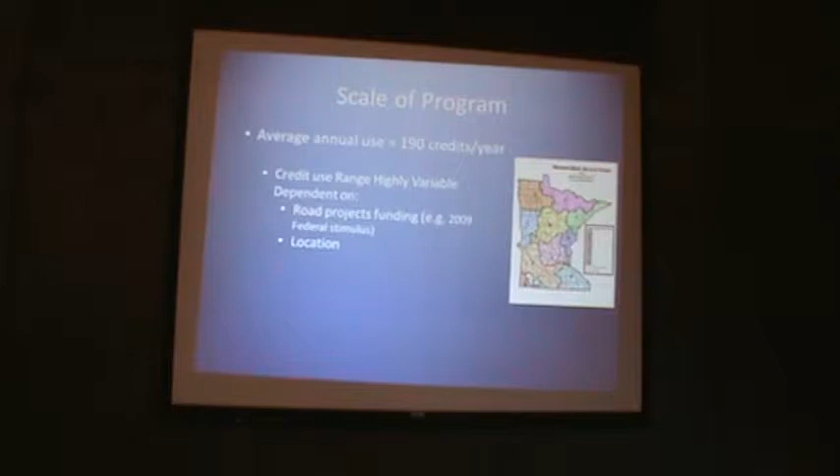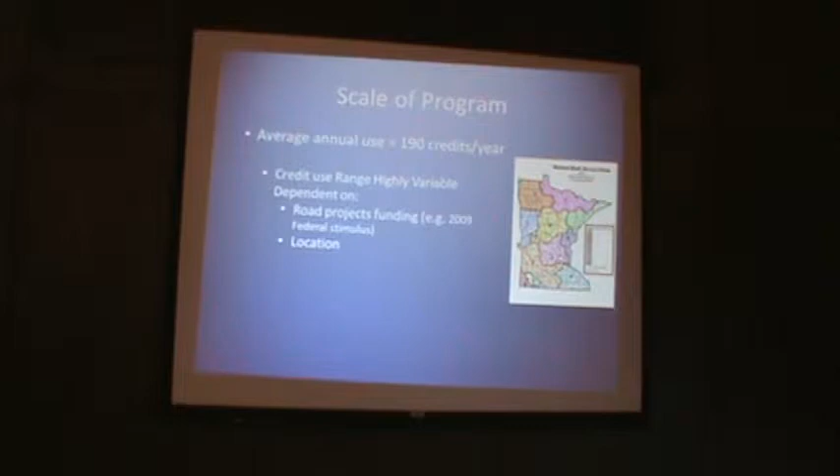It's also dependent on road funding. Remember back in 2008, 2009, the stimulus packages? Road projects were the number one game in town. So it's highly variable how we use these, and we have to go to the legislature and say, for this next biennium, we need $10 million. They say, why do you need that much? Well, here's our basic use. So it's hard for us to give the legislators a hard number, but those are some of the things we have to play with in order to receive the funding.

So who can use it? Local road authorities—these are cities, counties, townships. And that's about it.

People that can't use it are airport commissions—it's not a road, right? Train authorities, again, it's not a road. State agencies, in particular, in most cases we're talking about the DOT here. They have their own replacement program, they have their own wetland banks, and that's kind of how we got started. The DOT was a partner with us.

Developers can't use it. Now, some people argue, hey Dennis, these developers are creating new roads, okay? New roads, it's not eligible. But what if they're doing a development and the city says I need a turn lane here now because you're doing this? Well, that turn lane is caused by the development, and that's why it's not eligible.

Federal agencies, U.S. Fish and Wildlife, Forest Service, and tribal governments. Now, the caveat with these two is they're big landowners in the state of Minnesota, and what goes through these? County highways, right? A county highway has a right-of-way through that. So if a county road is going through Forest Service land, that's still eligible for use in the program because it's in that right-of-way. And the applicant is going to be a local authority.

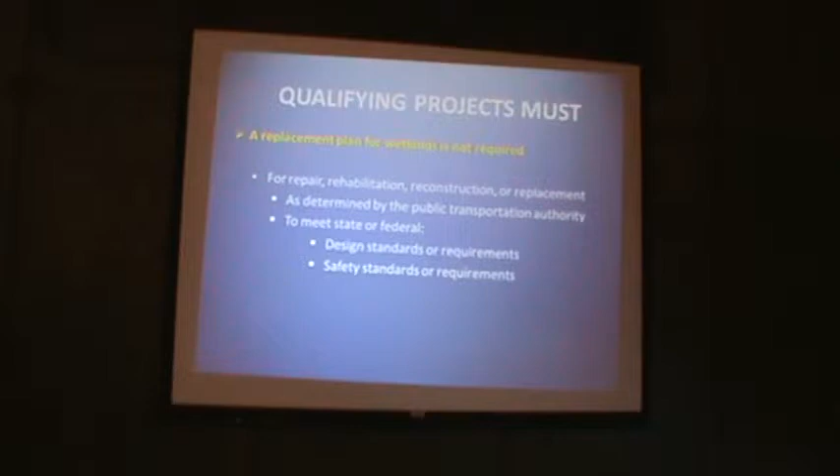A replacement plan for wetland is not required. The legislature said local road authorities, you don't need a replacement plan, because we are the replacement plan—we are the credit generator. So if there's no replacement plan, there's no LGU decision either.

We'll get into that. This is for repair, rehabilitation, reconstruction, or replacement as determined by the public transportation authority. Now that's a lot of authority right there—a lot of power that the local road authority has, because they are the ones that determine the project need. And it's to meet state or federal design standards or requirements, or safety standards and requirements.

And this is where the TEP comes in. We don't evaluate the standards—we're not traffic engineers or safety engineers. We just make sure it's in the application.

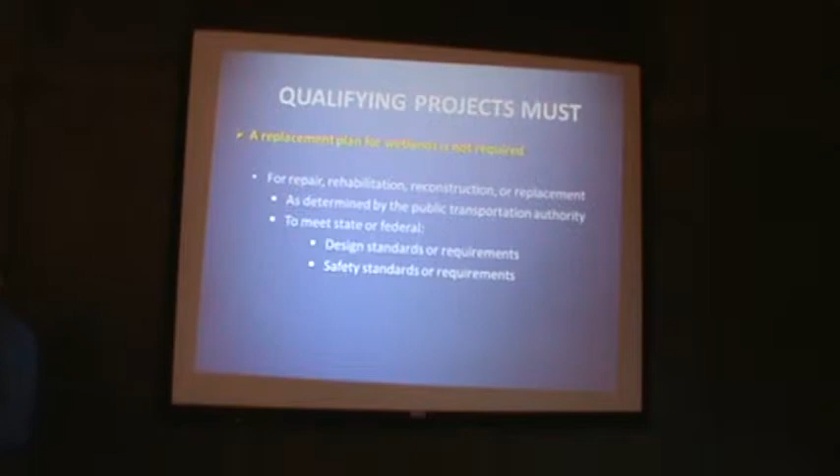Okay, a project must minimize wetland impacts. Now, how is the TEP supposed to look at a project and say you're minimizing these impacts, if we don't know what the standards you have to meet are, right?

A project must also consider replacing important wetland functions on site. Now, I've been doing road projects for over 10 years, and I really haven't had a situation where we've had on-site mitigation that was unique—think of a wetland adjacent to a trout stream, something like that, or maybe something with T&E species in it. It's got to be pretty special, because on-site replacement, a lot next to a road, not all great.

Project applicant must provide plans to the bank administrator—that'll be at the tail end. And the TEP members is where you really need to focus your efforts, because they're going to be the qualifying governing body there. And then any public requesting a copy—we don't get that too often.

So these plans have to come in prior to construction at least 30 days. Now that's high risk, okay? So what happens if you say, you know what, here you go, Dennis, 30 days, I'm gonna start my project. Then, sorry, Allison, guess what, you're not eligible. What did you just do to your client? You really put them in a bind. So maybe this rule or statute says 30 days, but don't do it. Get yourself way ahead of the curve.

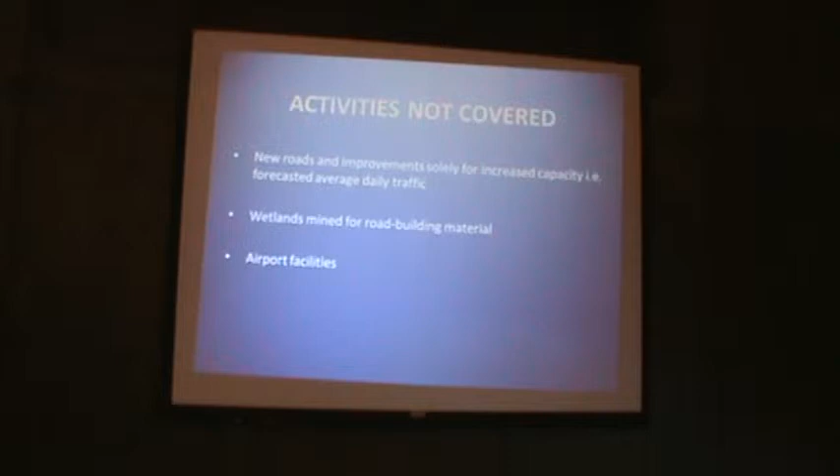Non-transportation facilities, county highway, local road authority, I need a salt shed. All right, hey, City of Columbus says, you know what, Dennis? We're gonna put a parking lot here, this is a ride and share, this is gonna take vehicles off the roads, make the road safer, blah blah blah. Sorry, can't do it, no parking lots.

This one comes into the metro quite a bit. We got to increase the drainage. This got developed over here, this got developed, and this got developed, and all of a sudden I got all this water. Well, unless that water is a threat to the structural integrity of that road... Remember, the drier the core of a road is, the safer it is. And who goes, if you're driving down in northern Minnesota and you know this road is through a wetland and you start seeing this action, right? We've all driven on those kinds. That's because the core of the road is saturated. So only if it's threatening the structural integrity will we cover it.

Roads through tribal or U.S. Fish and Wildlife ownership and control, okay. This is a forest road, this is some small two-track or paved road in the reservation that does not have a right-of-way.

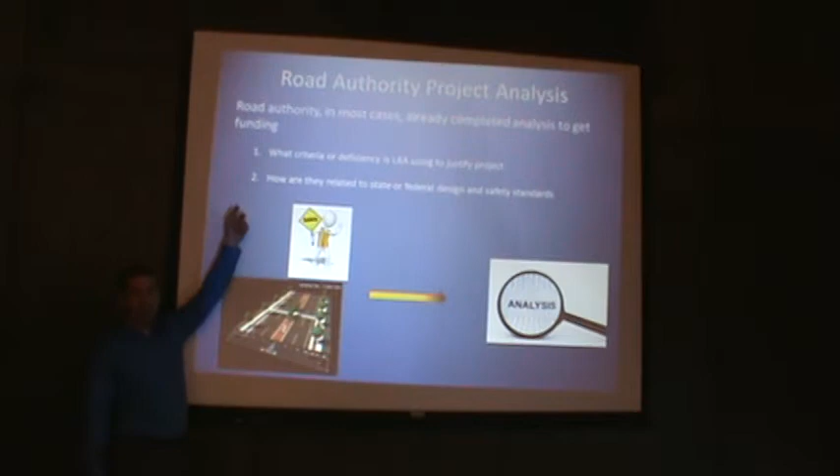Generally, in order for a local road authority to get funding from federal highways or DOT, they had to do some type of analysis to get the funding. So, the two things, and these are the two things I want you guys to think about every time you write an application.

If there's two things you take away from today, it's these right here. What criteria or deficiency is the local road authority using to justify the project? What is it? What's going on? Is it a design issue? Is it a safety issue? Is it some other requirement? And then, how are they related to the state or federal safety standards that are out there?

What I've learned through going through these applications is there's so many things to look at. There are MnDOT state standards. There are. But that doesn't cover all the situations. There's what's called the Highway Capacity Manual. It's kind of like a user's guide on how things go. So these are the kind of things we'll be looking at.

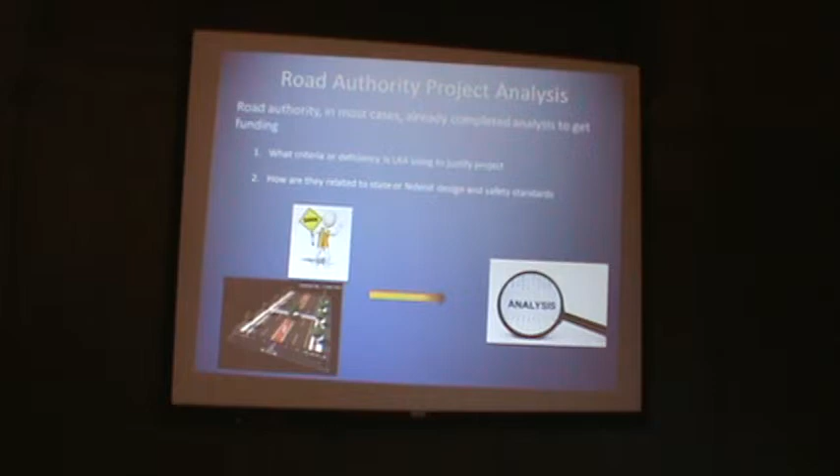And remember, as a TEP, we're not judging or evaluating these standards and practices. We just put it in the application. You say, Dennis, I gotta have this because this state standard says I gotta do this. Okay, it's in the application. Good.

All right, so some common data, ADTs, and I realize that not every local road authority is going to have the level of data that we go through here. Sometimes they don't have any, if they're doing it on their own, which is a tougher argument for you as a consultant, but it doesn't necessarily kill the project or kill the use of the program.

So here's some common ones. ADTs, again, show the deficiency in the current conditions. Why? Like ADT is way too high for this type of road. This is a 2-lane rural undivided. My ADTs are 15,000 and it's rated for 10,000.

I'm not going to pretend to understand what 15,000 cars a day looks like. What I'm going to do is make sure it's in the application, and then put it into context: how that project meets the standards.

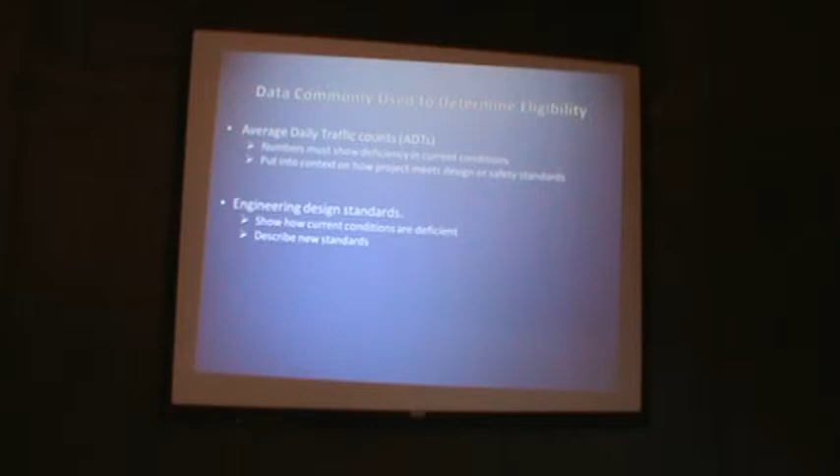Engineering design standards - there's a lot of professional judgment when it comes to these engineers. It's fine, they're an engineer, this is their job. But they need to be able to communicate what these standards are and the justification for those standards. Sometimes there's new standards that come in. Bridges and culverts - all of a sudden, hey, I got to do something. Well, now there's a new water quality standard. What is it?

And they said, well, here's a table, and this is for a bike trail, or for the road that's going to be also used to facilitate bike travel. They say my lane width has to be 12. Currently my lane width is 11 feet. My shoulder width has to be 6 feet. Right now it's 3. Okay, you're in.

Data commonly used to determine eligibility - this I just recently got from an engineer at SEH, and I really appreciate that.

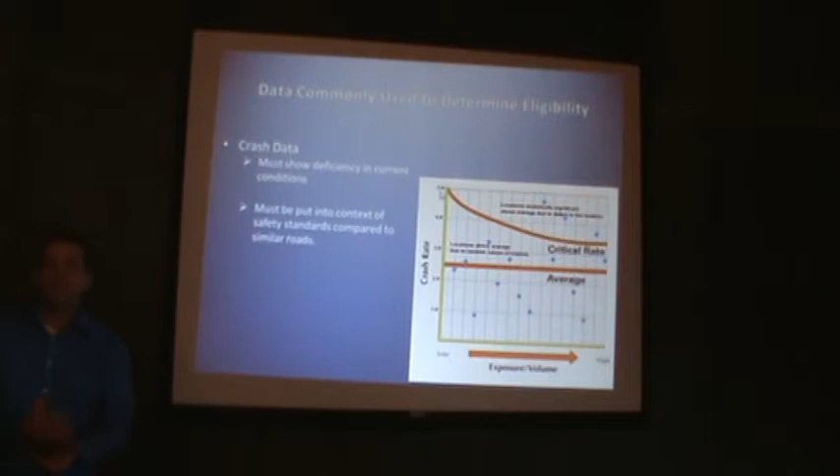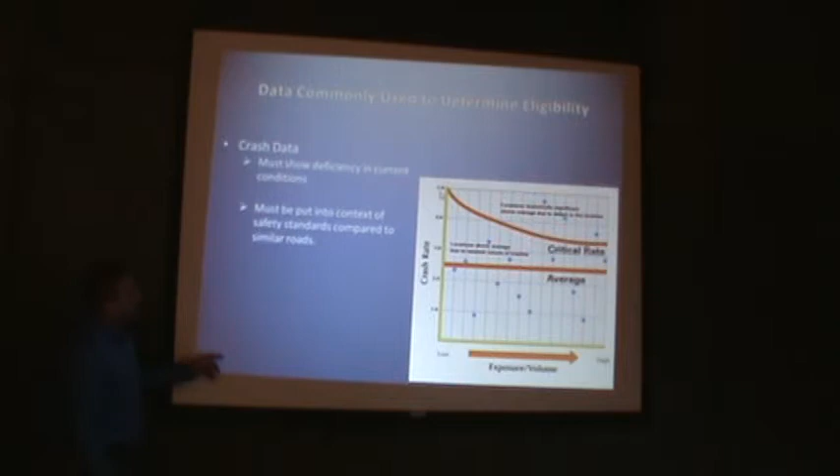So, an intersection, they'll measure the crash data. There's several ways they'll measure it. They could do it in per million vehicle miles, which I have no idea what that means, but there's different ways to evaluate it. One way is they look at these roads. So here's your crash rate here, here's the average - that's safe, we're good to go. Here's like, there's just a random nature to crashes, and you're still fairly safe.

And here's this critical rate - hey, this thing is bad, we're going to change things. So in that crash data, show the deficiency, and then put it into context for me. We're going to go through some specific examples of applications that have come in that I've reviewed. All right, so that's what we'll do here. Questions so far? Quiet group, it makes me nervous.

Okay, so turn lanes - maybe you look at the ADTs, maybe you look at crash data. Are they higher than the state or federal standards? So you think of a turn lane, what else are you going to measure?

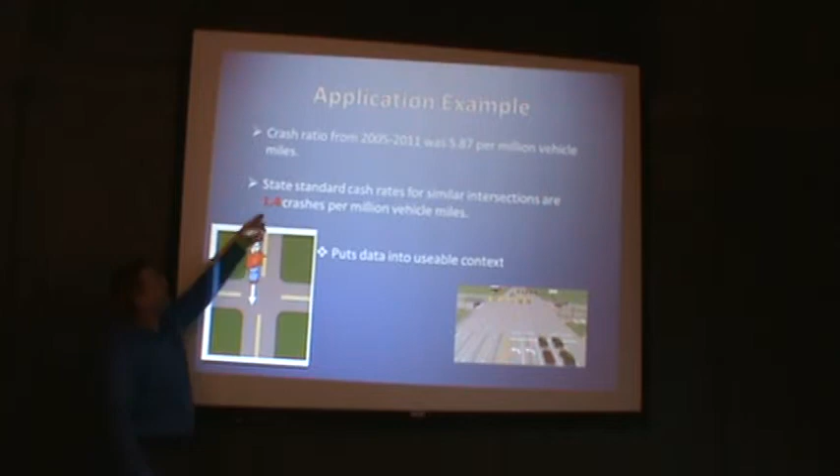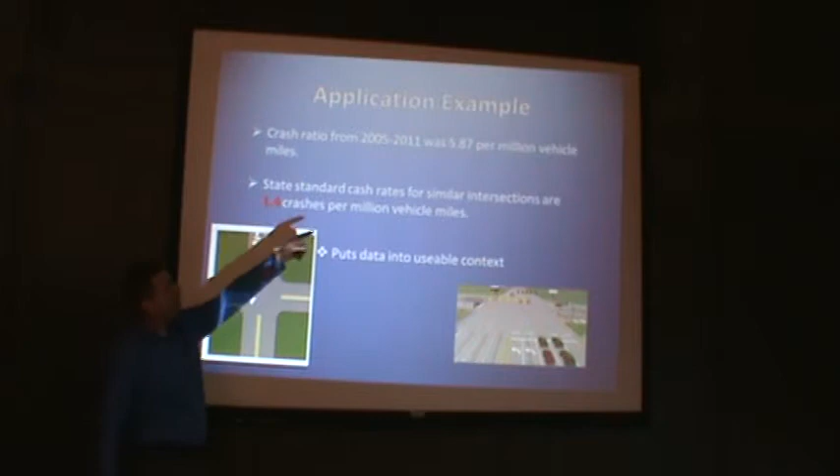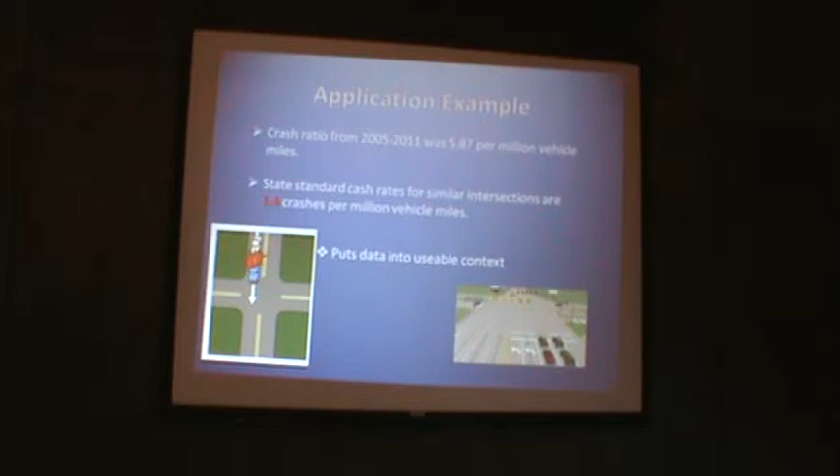Here's an application that came in. They said the crash rate from these years was 5.87 per million vehicle miles. I have no idea what per million vehicle miles means. Okay? They said that for this one, the rate was 5.87 for that intersection. State standard said 1.4. Now the fact that I don't know what million vehicle miles means is irrelevant. What I know is they have 5.87 currently, and this is the limit. So they put the data into usable context. Now I understand. Oh, okay. You're unsafe, that's what I'm trying to understand. Is this unsafe or not?

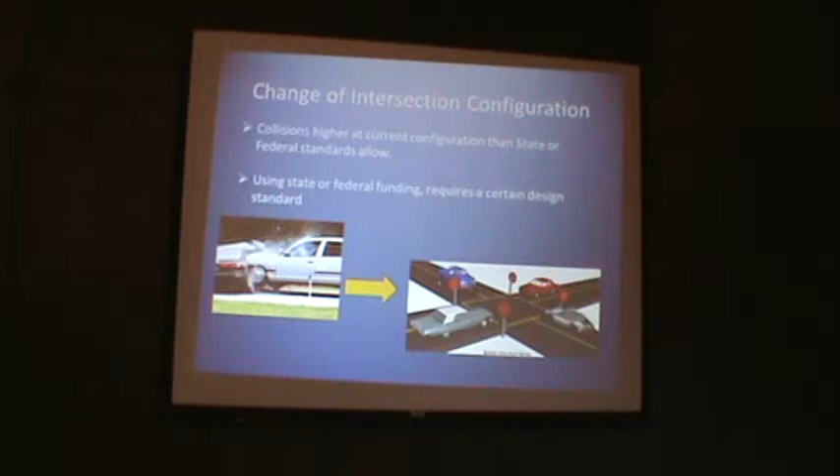Change of intersection configuration: collisions higher at current configuration than state or federal standards allow. A lot of times, if you're using state or federal funding, there's limits on you. These are your standards, here's your MnDOT road design manual. It'll be your job as a consultant to go through and figure out what part is applicable. If you give me the whole manual and say, here you go Dennis, this is the standard, I can't use that. So they have to go through it and find what's applicable.

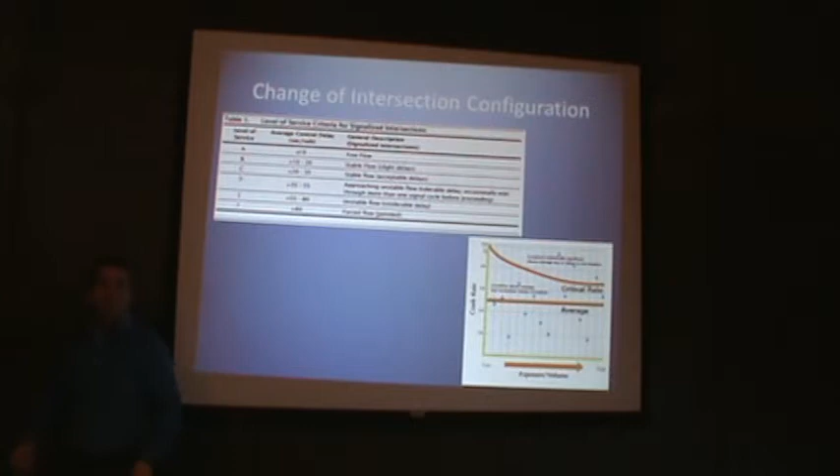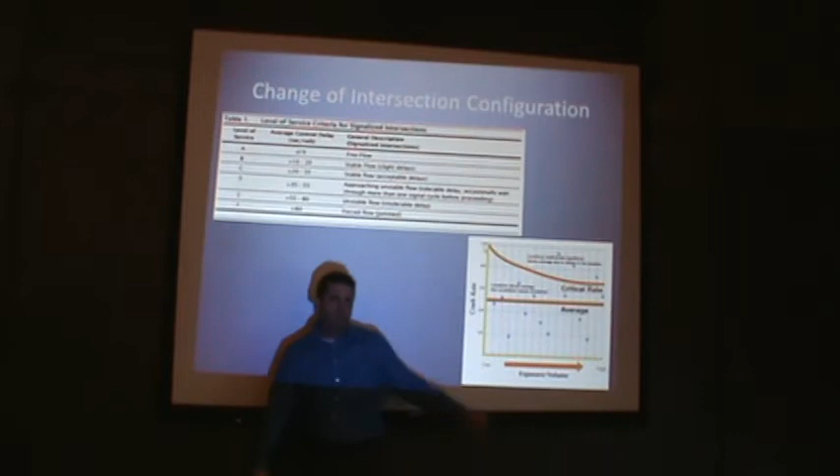They also looked at this. They said, hey, some of our intersections are here, some of our intersections are here, and some of our intersections are here. Okay, so here we are. This is a project that we're currently working through. I've got 6 intersections, some are safe, some aren't. What am I supposed to do? Well, I'm not going to sit there and try to pick apart, this little bit is eligible for the program, this little bit isn't eligible, because really, where's the level of service for that? In my mind, I'm thinking, hey, you're in or you're out. And if we can make some justification that you're in, you're good.

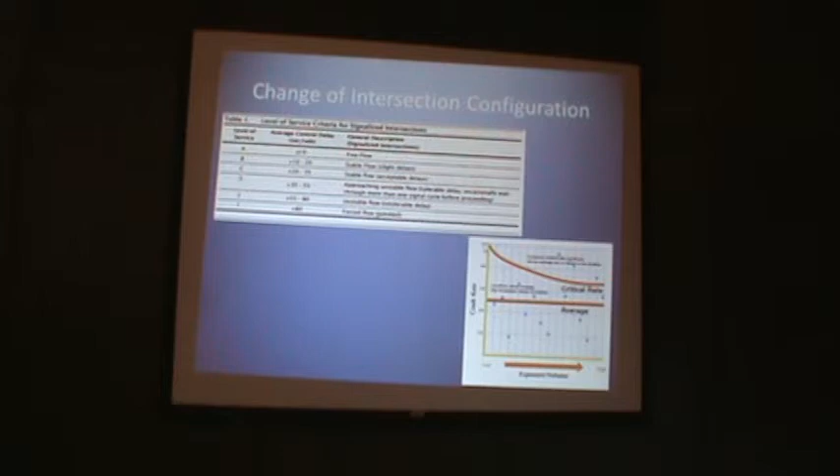So here's an example that came in. This one, they measured the fatality severity rate for the road. It was 1.05. Again, I don't know what fatality severity rate means, how that's calculated or anything. I'm taking your word that it was 1.05. Or, I'm sorry, that the standard is 1.05. They came in and said, hey, this intersection is 3.05. 3.05 is greater than 1.05. That's what I'm going to look at. That makes sense? It's in the usable context.

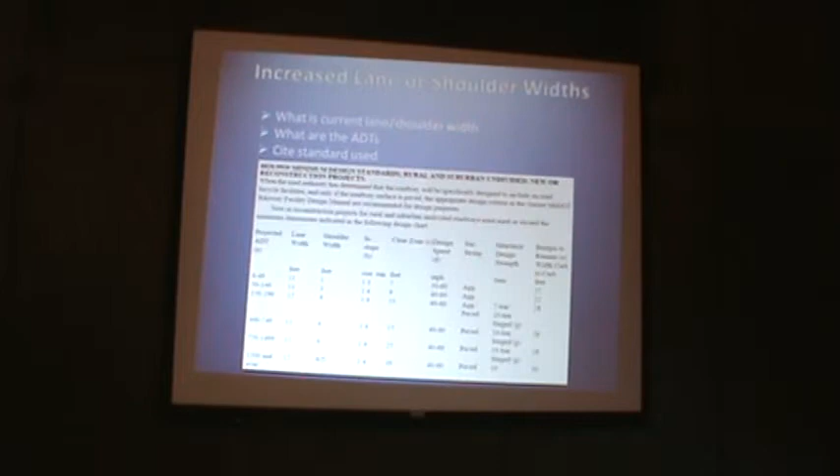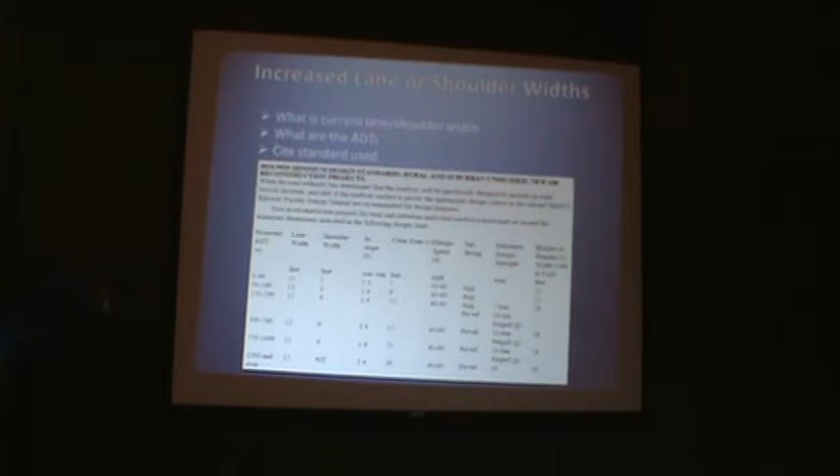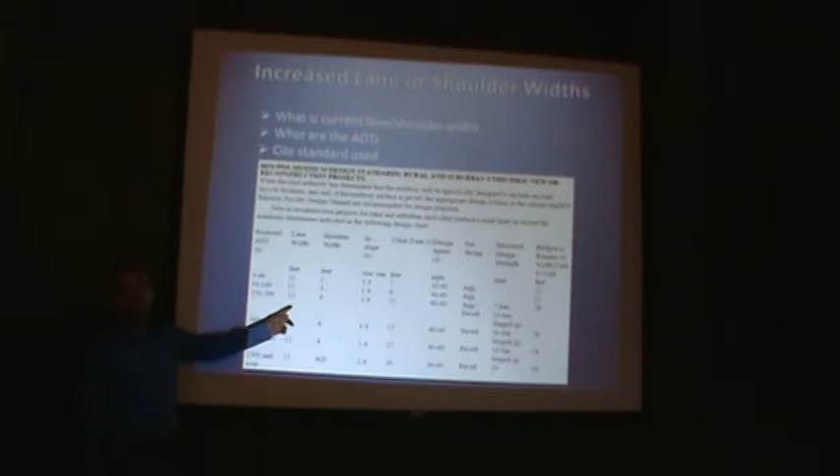All right, these are very common. These are going to fall into the repair or rehabilitation category. What's your current condition? What's your current lane or shoulder width? What are your ADTs? Does it matter? Maybe, what standard are you using? I'm picking on this one because it was easy to find, but there's about 40 of these tables in that design manual. And 8820, it's a real state statute out there.

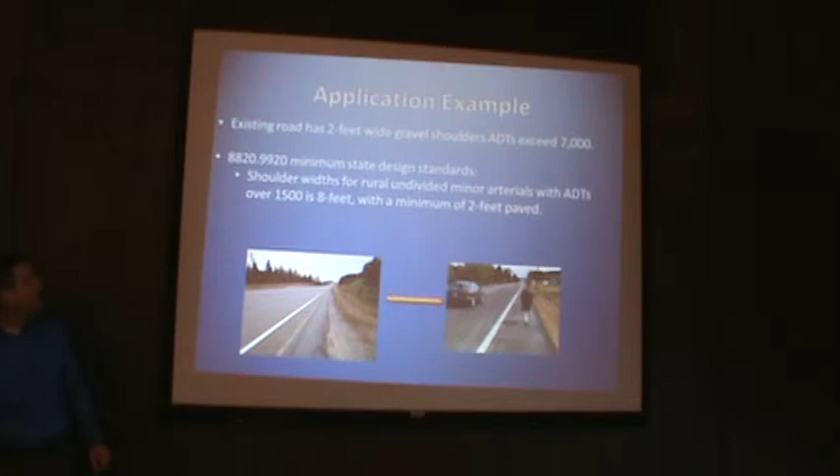All right, so here's one. Existing road at 2 feet wide gravel shoulders, ADTs at 7,000. Okay, that standard that I just showed you said, hey, at 1,500, I got to have 8 feet, 2 feet minimum. So you told me what was wrong, and you cited the standard. Do you see this recurring thing that I keep going over?

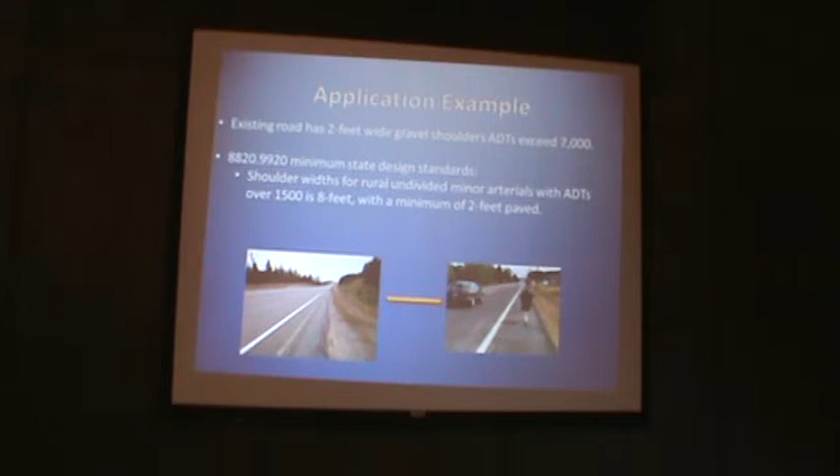It's one of the biggest problems that we have, is the lack of justification for the project. I get these applications that come in and they say, we're going to do this and we're going to use the road program. That's all I get. How am I supposed to react to that?

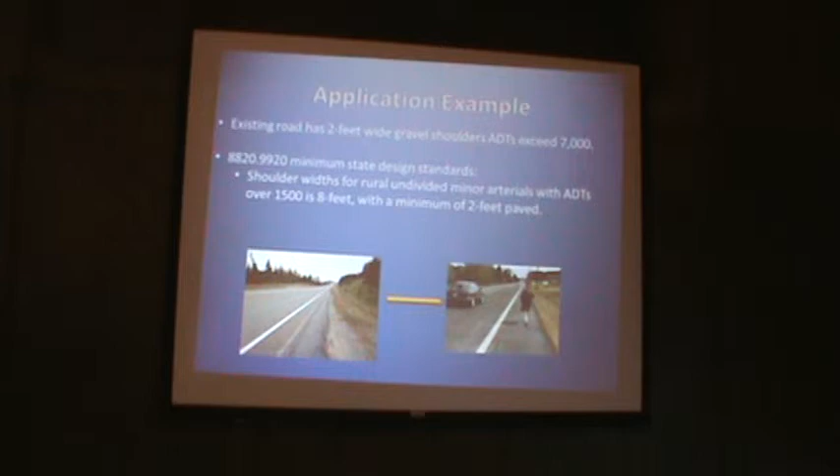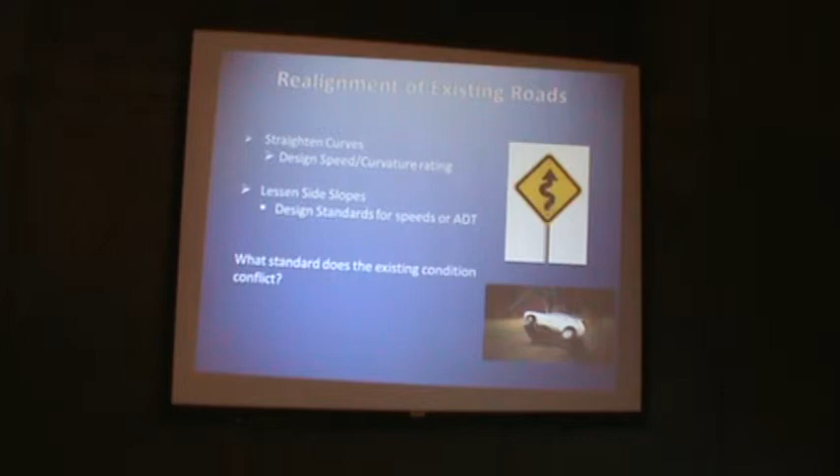What if you're straightening curves? You've got a really windy road and now it's starting to be used more frequently. There's design speed curvature ratings out there. So I think some of your bigger firms may be at more advantage than some of the smaller ones, because like SEH, you got design guys, they can pull this stuff off. Because we're wetland consultants, what the heck do we know about this stuff, right? If you're going to lessen the side slope, go from a 2-to-1 to a 4-to-1, there's design standards, or speed design standards, and average daily traffic counts that you can use to justify that project.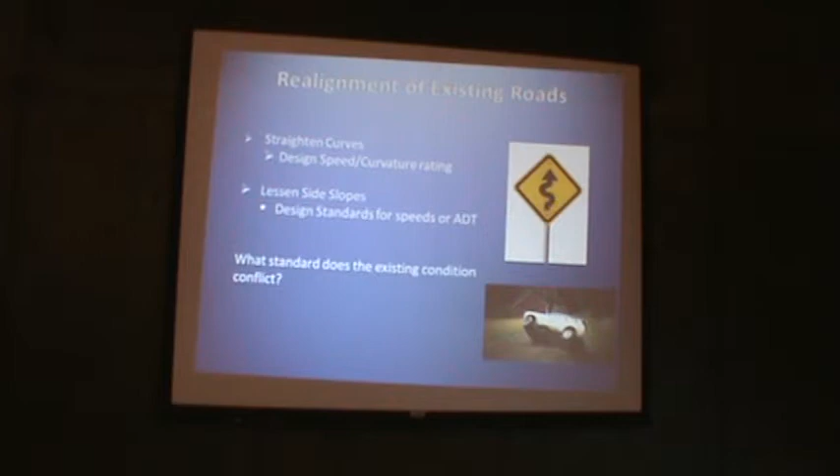What standard does existing condition conflict with? Keep that in mind. That's a question to keep in your head as you write the application.

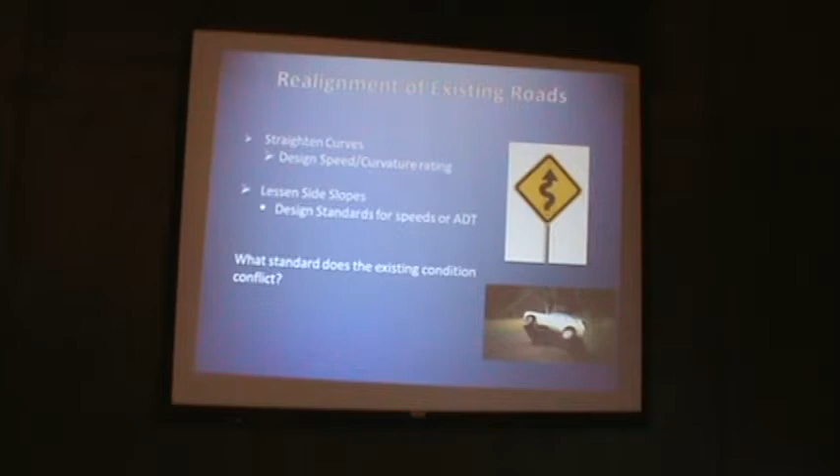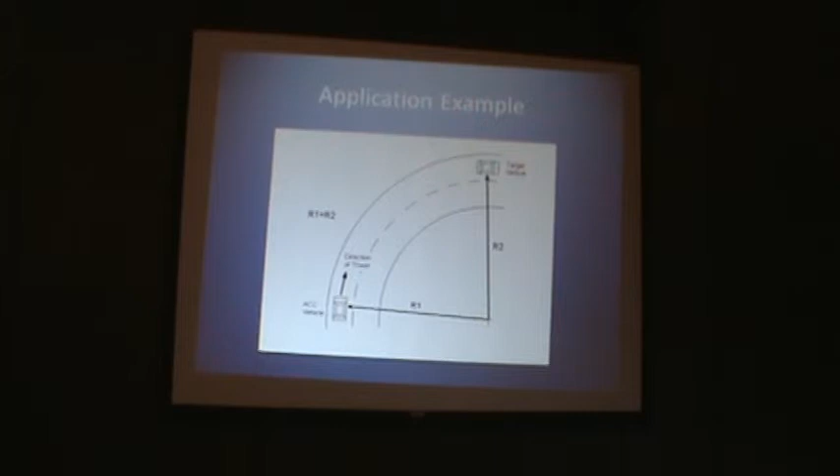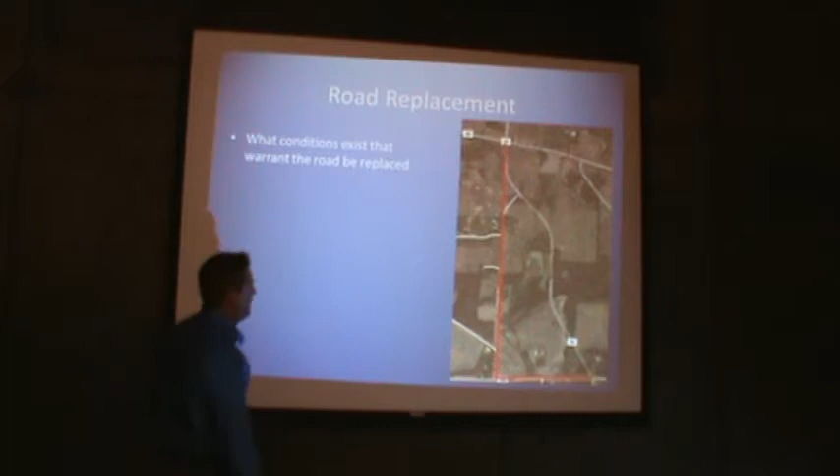All right, here's a road replacement. This is where they moved the road. Brand new. Here's where the road went, this red line, and then they moved it. And I said, what the heck did they say?

They said for this, the ADTs, over the last 15 years this place had a lot of development, okay? And it happens to be adjacent to or nearby 35W. So you've got a lot of people—this is a bedroom community—hitting this county road, coming down and getting on the freeway.

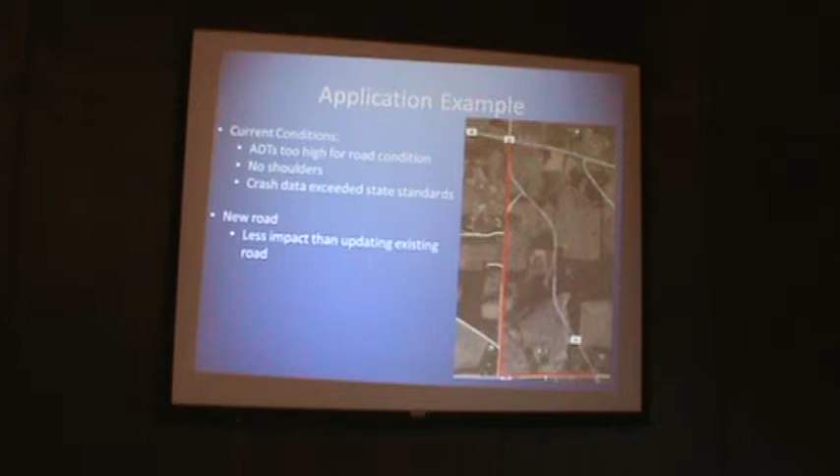Well, they said, Dennis, I need a new road. So why can't you use this existing road? Well, right now the ADTs are too high for that condition. There's no shoulders, so it's unsafe. We're having crashes left and right because you've got farm traffic mixed with people trying to get to work at 8 o'clock in the morning in the cities.

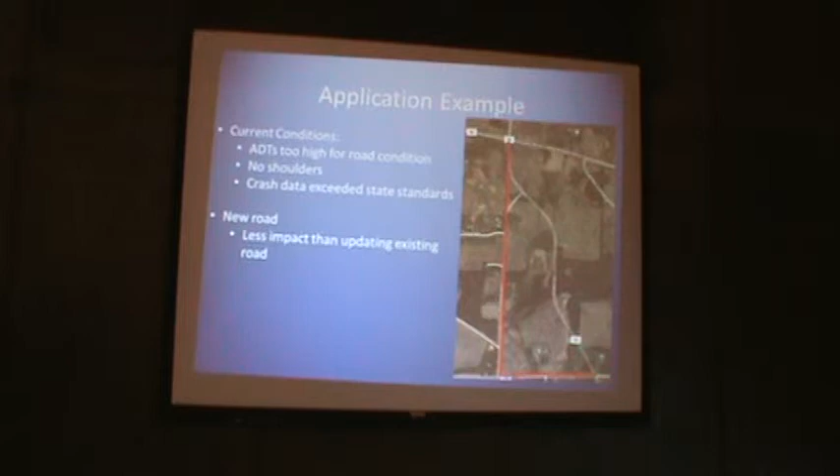So they said, look, we're just going to design this new roadway. As they designed it, it ended up having less impact than widening and updating the old road. They kept the existing road because farmers were using it. They met safety standards, design standards, and minimized wetland impact. We didn't have to do anything to this other road. So we got them in.

That was a tough one. I don't remember who wrote the application, but they were very persuasive and did a good job.

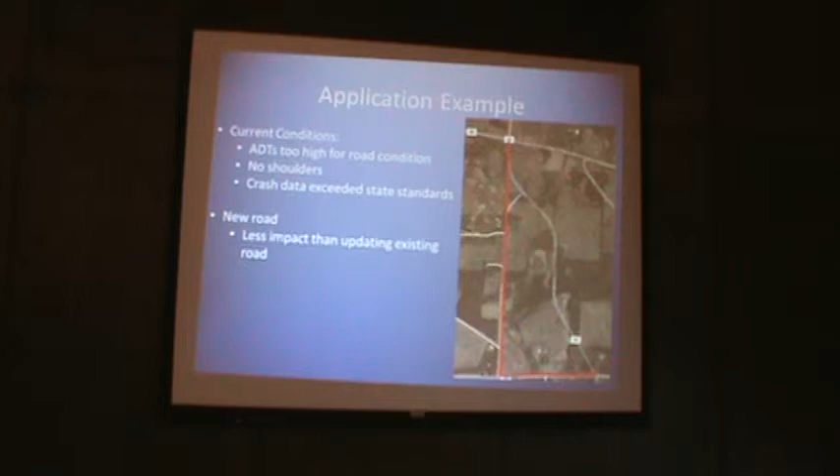This program, it's tax dollars. People say, oh, we're going to use the BWSR program. It's like, well, I'm not paying for it, BWSR's not paying for it—we're paying for it. It's tax dollars. We just happen to have the authority to manage it.

So we're not sitting there trying to hoard these credits. We want to push them out the door and help local road authorities. So good applications—great, that helps.

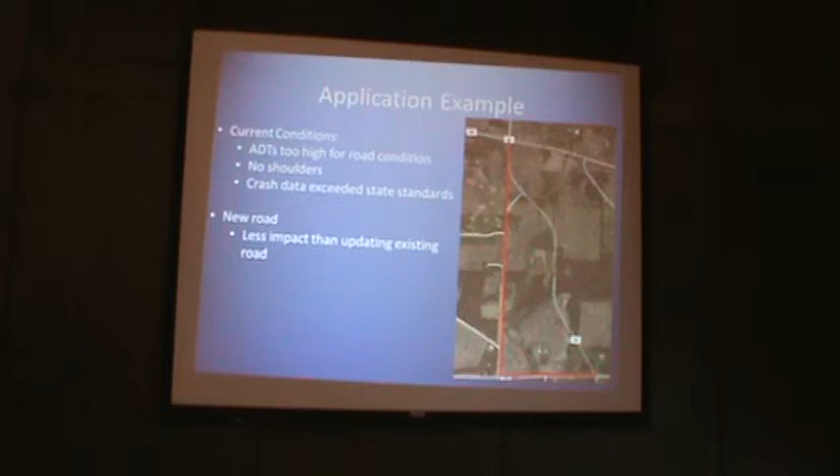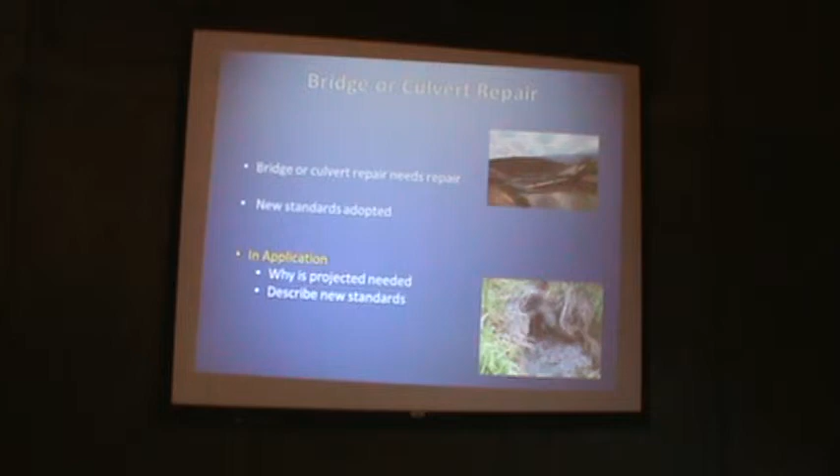All right, so a bridge or culvert needs repaired, and all of a sudden there's new water quality standards from the watershed district or the MPCA. Okay, fair enough. Why is it needed? What happened? Well, the culvert's destroyed—okay, that's fair enough. And the new standards say I have to have a 36-inch box culvert instead of this 18-inch corrugated steel one to reduce velocity. Super, great.

Curb and gutter—this one's pretty big in the metro right now because you've got a lot of these roads built back 30, 40 years ago, and now developments are springing up and they're going to redo the road. Curb and gutter, the city says, here it is in the rule. So why is it needed? Give us a justification, discuss what standards there are. City says we have to have this because of this. Okay, great, super, thank you. You're in.

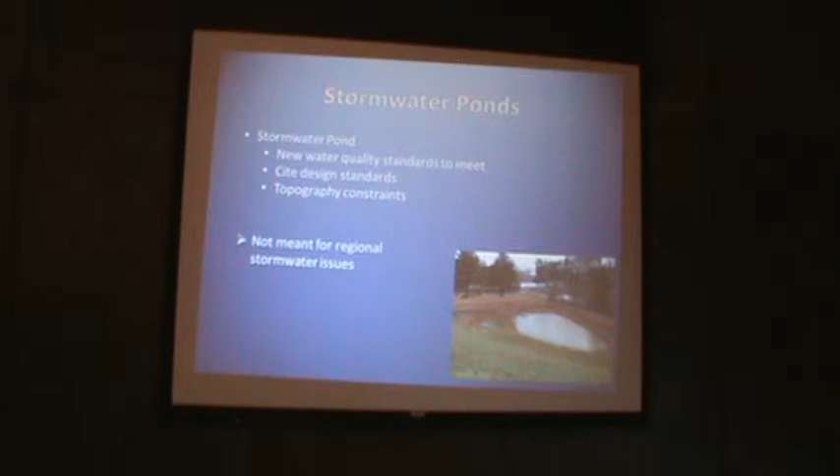Stormwater ponds—our water quality standards have increased in the last 15 years. We see a lot of these projects, and where's water going to go? It's going to go to the low spot, right? So we end up having these stormwater ponds in the wetlands. Cite the standard, tell us what the constraints are, we'll get it in there. But it's not meant for regional stormwater issues—not regional stormwater ponds.

So here's a real application that came in. They said, we're going to repave this road. While we're at it, we're going to install curb and gutter because we've got new water quality standards, but we've got this existing issue. So their solution was to create a regional stormwater pond—take care of drainage issues, repave the road, and increase downstream water quality all in one shot. Great, super project.

We replace for this? Somebody answer, I'll sit here all day. No? Why wouldn't we replace for curb and gutter? If they justified it—oh, for the curb and gutter, not for the regional stormwater. Right, yep.

So here's an application where the LGU is going to need to make a decision. This is one of those, if you're an LGU, where you have the TEP sign-up form and you make a decision.

Additional lanes, we get this a lot. They're only allowed if necessary to safely accommodate existing traffic counts, which kind of belies logic, because if a local road authority is acknowledging that this road is going to be used much more and needs upgrading, hey, that's great planning—that's a super project. Sorry, but currently, you don't qualify.

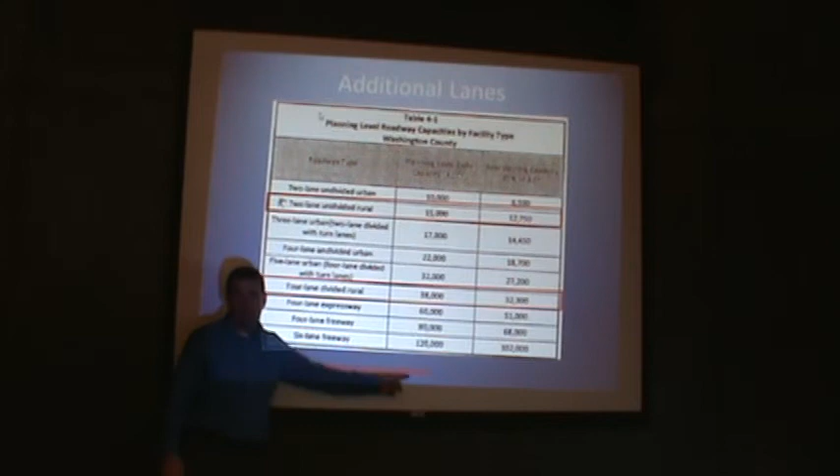They said our ADTs for this road were like 22,000, and our crash ratios were high, and the severity rate was high. I said, okay, based on the Highway Capacity Manual, this table pulled right from it. They showed me the data. You're in. Good job.

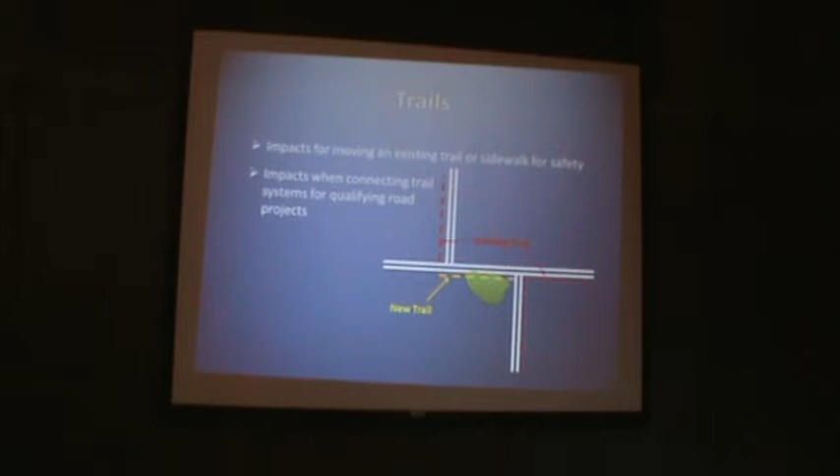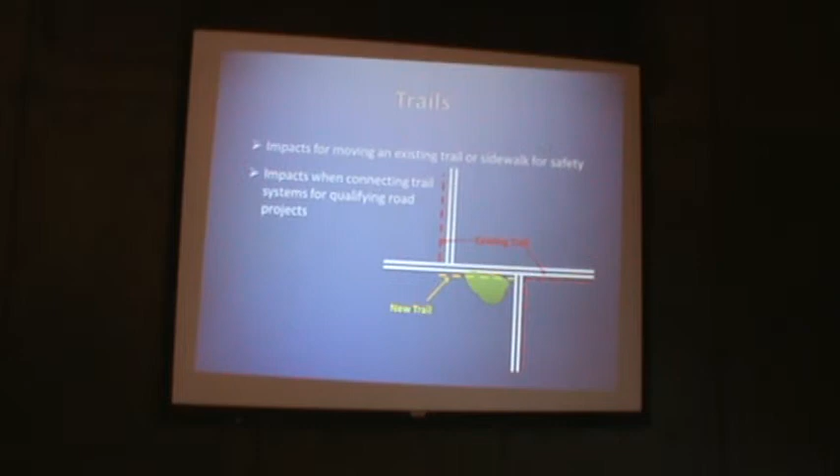Trails. These are hard. Who has processed one of these? How many times? Do we say no? Yeah, they're hard.

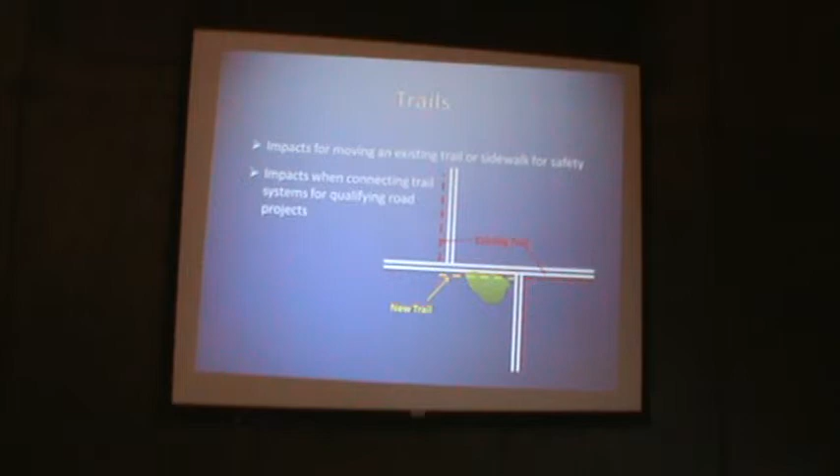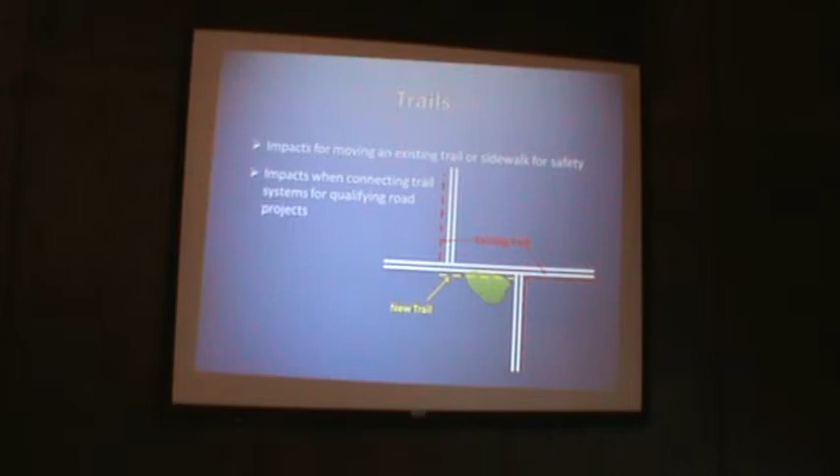Because where in the rule does it say anything about trails? The rule talks about road projects, roads. Why should we in any way replace trails? If you're impacting an existing trail, yep, if you are impacting or moving an existing trail, you're in, no problem. It's when you start having new trails or new trail segments that it gets sticky, okay?

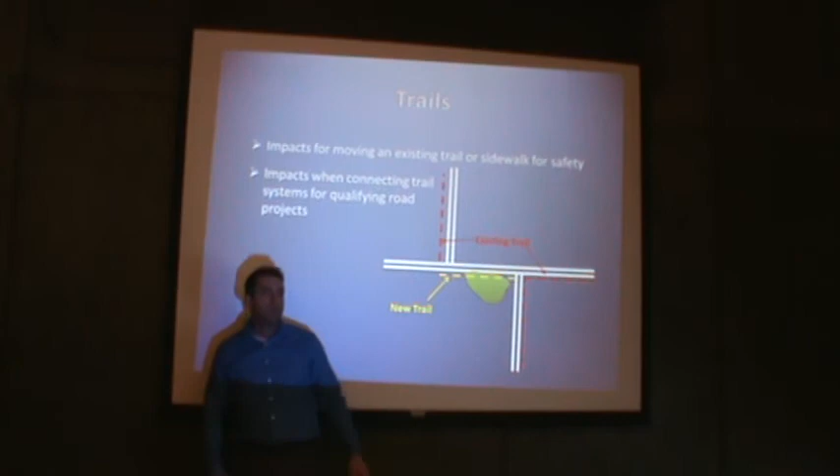This is an oversimplified application or scenario. Who thinks we'd replace for that? Anybody? Who says no, raise your hand? Who says yes? We will. We will replace for this.

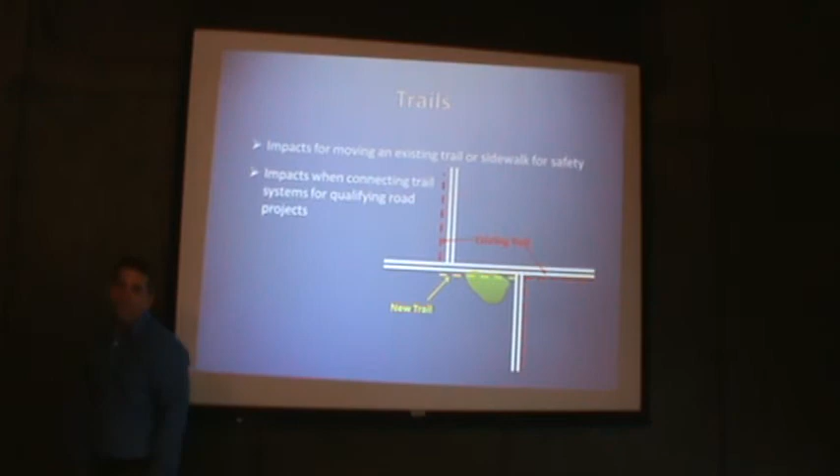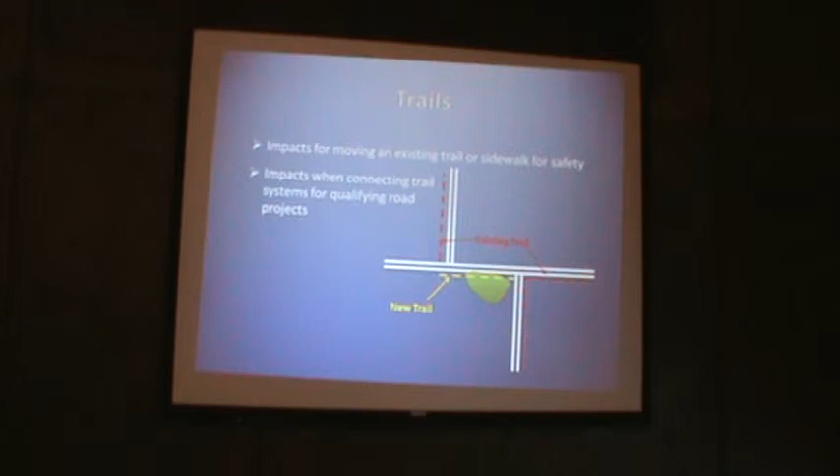This is very applicable in the metro area because you have such a high network of trails that it comes down to a level of service. Really, are we going to pull this little schmitzy thing out? It's where you have trails that never existed, and maybe they're connecting to these regional trails, but the extent is miles and miles. It becomes this scale issue.

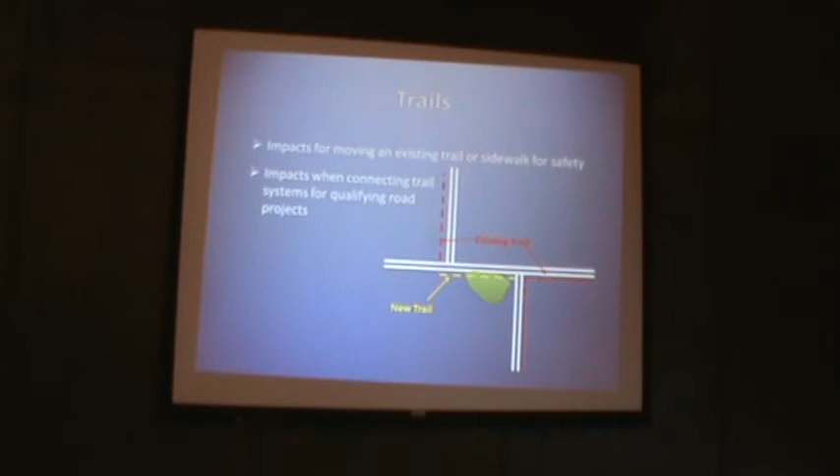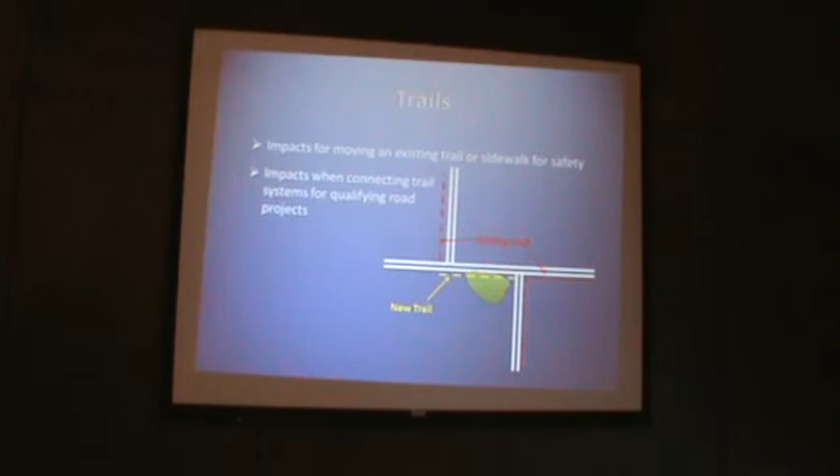So I can't sit up here and give you exact specifications of when we will and won't, because it's so variable that it's a case-by-case basis. So I will say this: in 2009, there was complete streets legislation. Anybody heard of that? Okay.

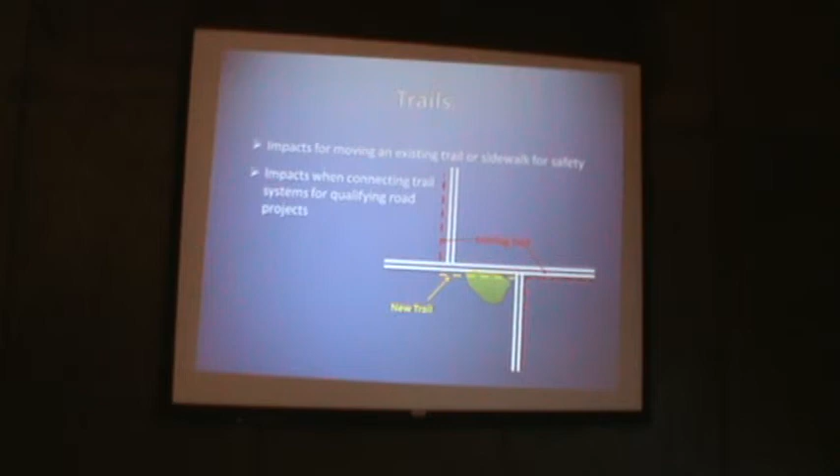Basically the legislature told these road authorities, look, you don't just look at the road, or look at cars and trucks as a mode of transportation. You look at all forms, bikes, pedestrians, whatever. Take a look at that and base your project needs on that. Now, you don't have to always do a trail, but by this state statute, local road authorities are obligated to look at this. And that's a tool for them to use.

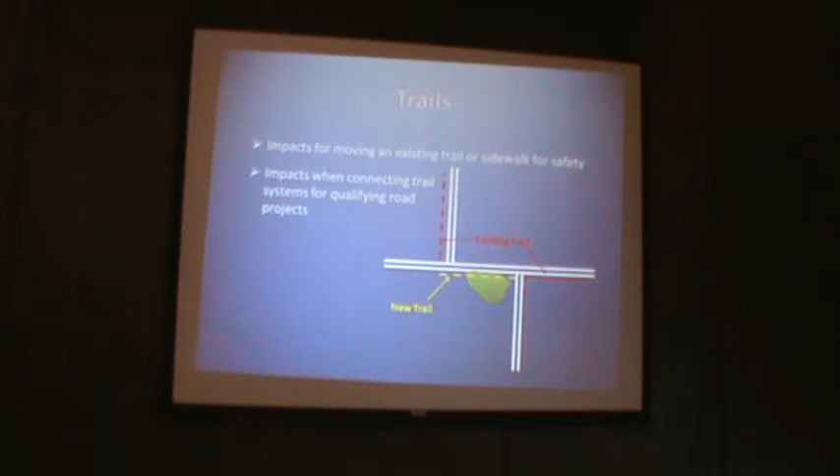And they can say, look, I got this trail over here, and I got this trail over here, and I got this school over here. And you just said the magic word. So these are going to be hard. Don't be surprised if half the applications you come in, we say yes, half we say no. Okay?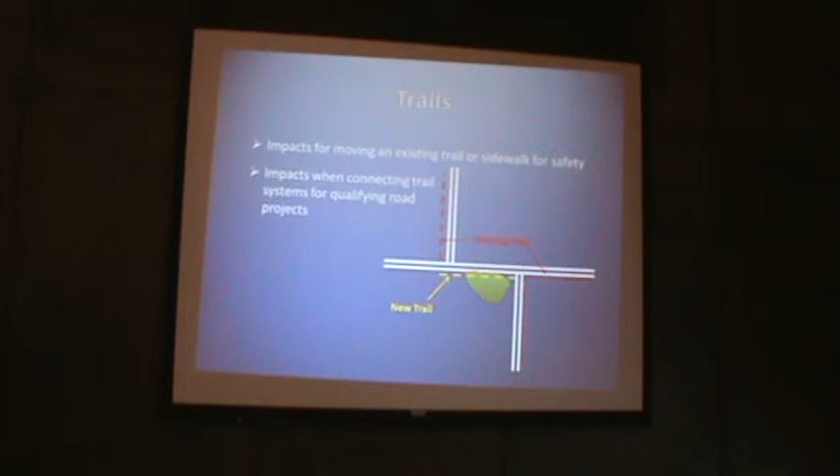How about trail widths? Take an existing 4-foot trail and standard 8 or 10 feet for two-way traffic, bike users, all that. Yeah, there's design standards for trails. So that'd be applicable to them just using this current design standard? If we say, yeah, you're good for a trail here, and you say here's the design standards for that trail. Okay, thanks.

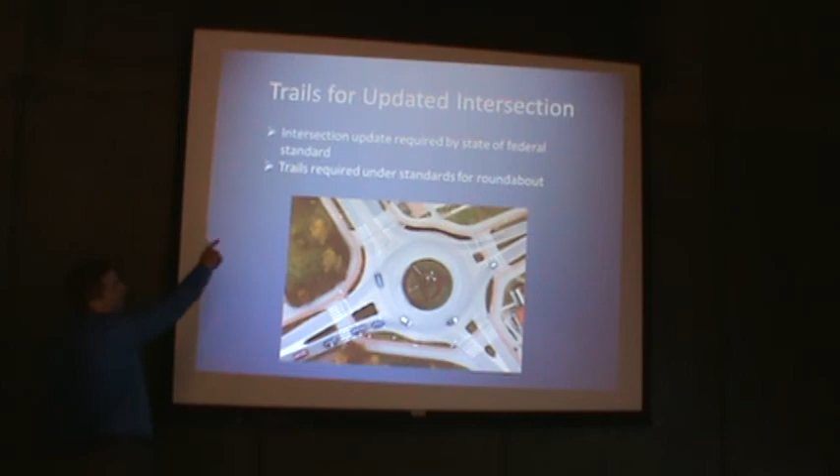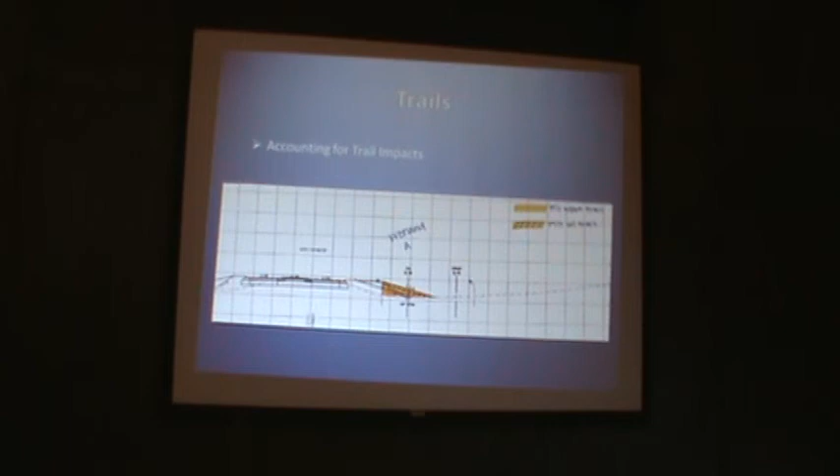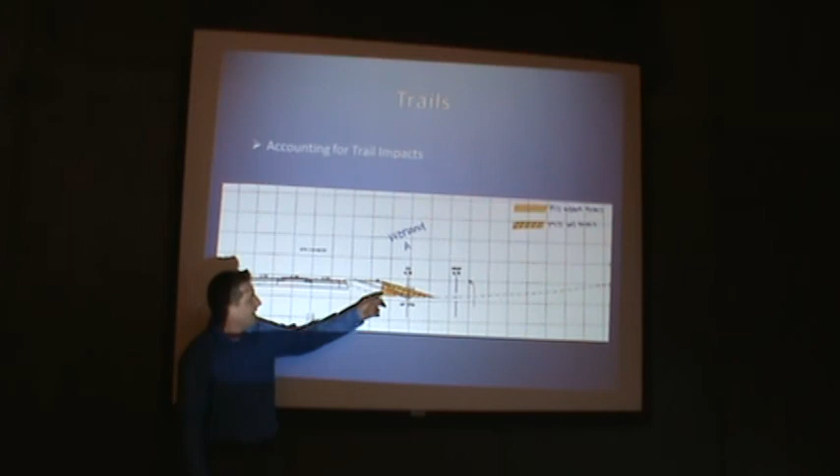So in your application, this came from an excellent consultant that I know. If you have an application and we say, look, no, sorry, trail isn't in, so you've got to do a private bank, now how do we measure the impacts? How do we quantify each set of impacts? So in AutoCAD, whatever the engineers use, they're going to do this design, and then you as a consultant have to find some creative way.

I like orange highlighter, it's very nice, to help us count up the number. How else are we going to do it? Okay?

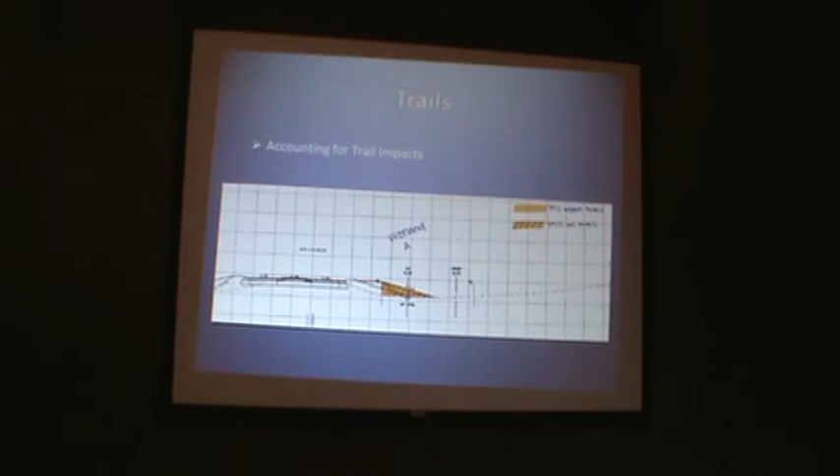Okay, so delineation challenges, and basically we're talking about ditches here. They can be fairly simple, and they can be very complicated, and they can be challenging to quantify.

So some things we look at: is this what's left of a historic wetland? Is it created within a wetland? Is it created within an upland? Is it an intermittent drainage way? Is it a riffle pool complex? Is it a deep water habitat? Maybe it's 10 feet deep, it's not even a wetland. The first step... I stop sometimes just to make sure I'm not going too fast.

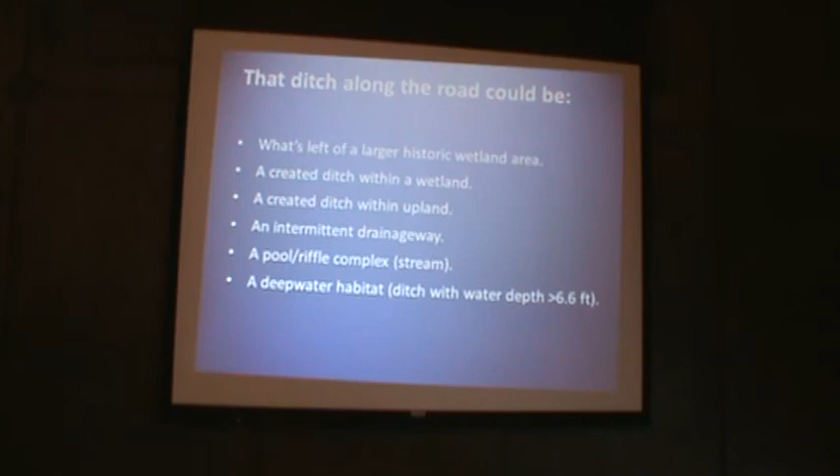Okay, the first step, and this really goes beyond just road projects, this is delineation in general, is when in doubt, go back to manual, okay? What is a delineation? It's an inventory resource, that's all it is.

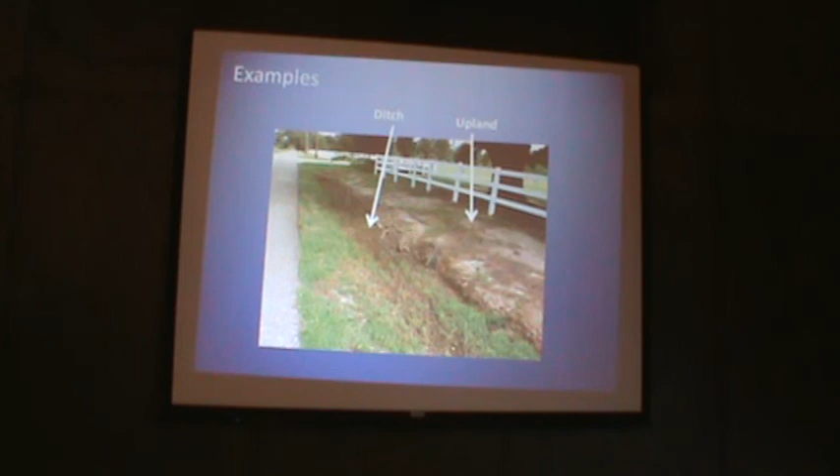All right, so I've got some examples. These are fairly simple ones, we wish they were all this easy. We have a ditch and we have an upland. Okay, so do you need a data point here? Really? No, not really, you gotta flag it. And don't just do a line, because how am I gonna count up numbers on a line? It's gotta be a polygon, okay? So in your delineation report, it could be as simple as a description, a map, you're describing the ditch, how it's excavated, and the surrounding area. Okay, easy peasy.

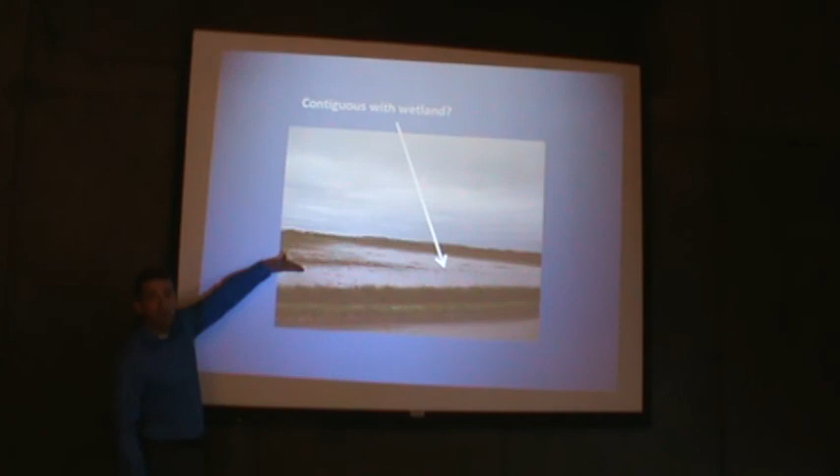And this one is contiguous with the wetland. So here you would just outline where the wetland is on this side and on that side. On that side it doesn't matter because maybe the right of way ends right here. All right, so in this situation, you go out there and you delineate it and you put a line around this one. Well, is this, once we delineate it, now we think about policy. Is that jurisdictional?

What if this was a Zimmerman sand? And this is an 8-foot deep ditch. Obviously, you know, a ditch to an upland, non-jurisdictional. This one's a little bit harder, okay?

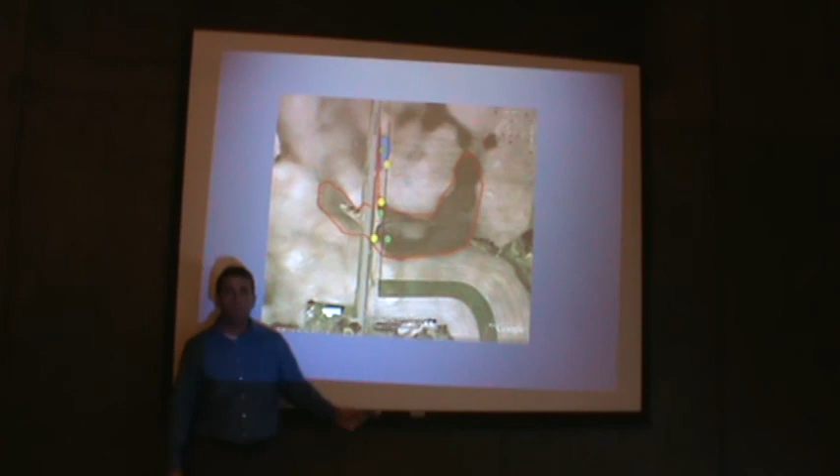Does this do anything for me? Does that justify a line? No, because the wetland goes way out. But this one here, now you're doing it parallel. And what about this one up here? Where your right of way is farther out than your wetland boundary.

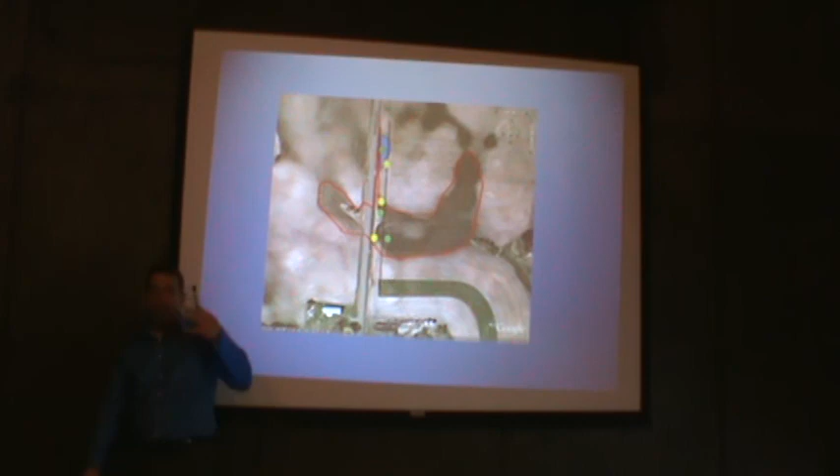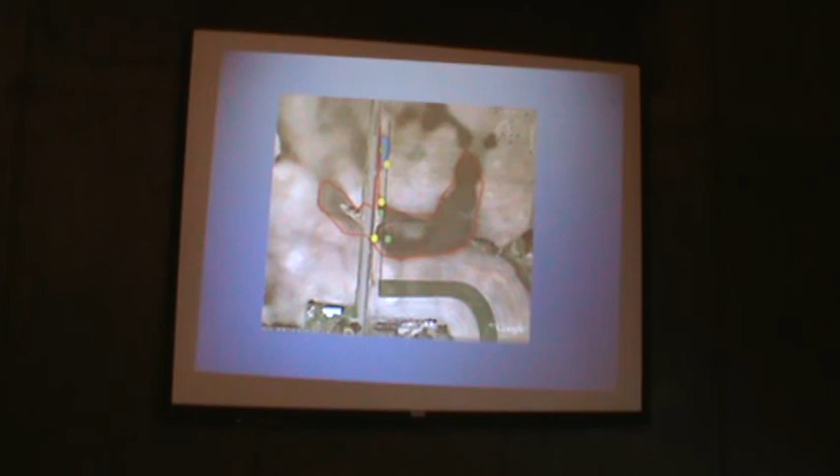So when you're out there, the point to this is think about where the data points are that mean something. Is a data point, is your dry data point on your road shoulder meaningful? No, it doesn't mean anything. So when you're thinking about where you put your data points, put them where they have meaning and put them where they're tough. Don't go for the easy ones. You know, if you have a 5-to-1 side slope that comes down to the wetland, well, that's an easy boundary. Put it where there's a zone. That's where the data points have meaning, that's where the real science comes in.